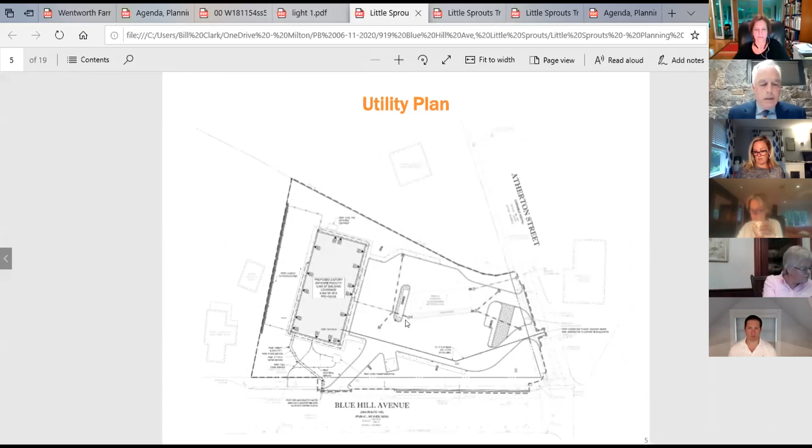Erosion control plan: we've got staked silt fence that will be spread around the site to catch any erosion during construction activities. The property will be graded so that the low point of the property is within the parking area itself.

Next, the lighting plan, and the following two slides show some cut sheets, but there are two double lights, one on each of the islands for the parking area. There's another one just off the corner of the building. It's a single light there.

Those are represented by the first two cut sheets, and then a set of lights that are attached to the building themselves. The lighting plan shows, it's difficult to see in this iteration, but it shows that all of the light is captured on the site. There's no light spillover, and because Little Sprouts is a 5-day-a-week daytime use, 6 a.m. to 6 p.m., there's no reason for lighting to be on beyond 1 hour after the facility closes on a daily basis, so lights, except for emergency lights, will be set to go off after 7 o'clock at night.

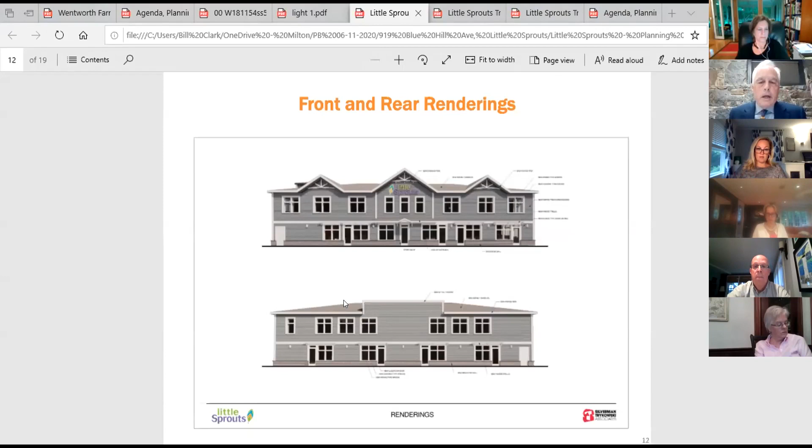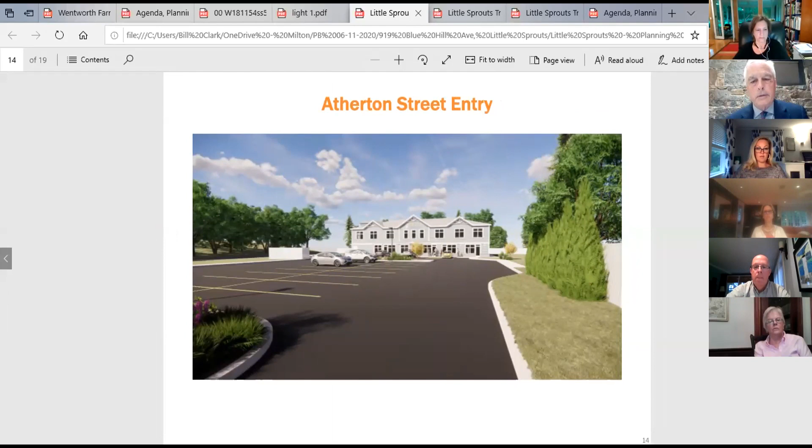Next. And then the Atherton Street entry, you can see the parking stacking on the right for 3 vehicles waiting for parking with the building to the rear, and then 2 further, more close-up looks of the building from areas within the parking lot.

So we know that one significant concern is the ability to park and handle the volume of activity that comes to the site on a daily basis. There are about 26 employees. We show 27 spaces. The employees will be staggered in terms of shifts when they come, because we open at 6, close at 6 or 6:30. There will be numbers coming in at different times, working essentially 8-hour shifts.

The other concern we heard was that Little Sprouts generally has a number of events per year, perhaps a graduation or some other community events, when they invite people in. These are carefully coordinated by the school administration with review and approval by the regional director to make sure they're well organized and that we are accounting for parking and other things.

Examples, some of which happen at the school, some in other places: a family paint night, a breakfast get-together, summer luau, movie night, or potluck dinner. Some events might occur in the evening, but most events happen during the day. There are also occasional events that take place off-site, like a Saturday apple picking trip or some other thing.

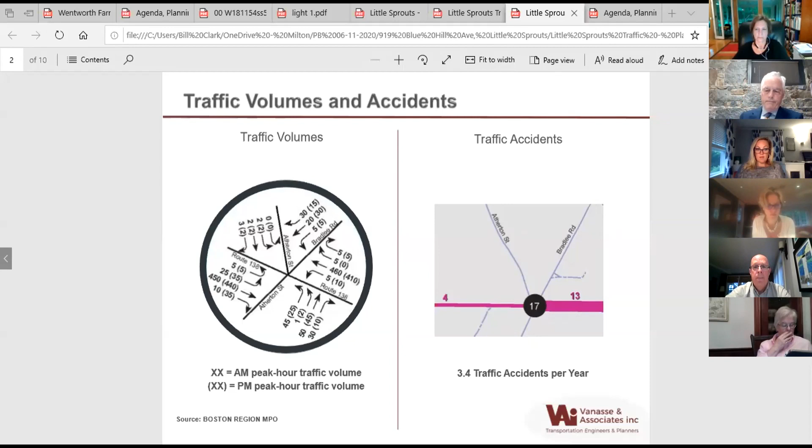In summary, based upon the MPO report, you have an intersection that operates very well today, and also very safely relative to the state averages. Next slide, please.

Our understanding is there is a plan to renovate the fire station, and within those plans, emergency vehicle access will exit from Bradlee Road. There'll be a system called an Opticom system where, when there's an emergency egress happening, the fire station will trigger the signal and get a green indication from Bradlee Road so they can exit quickly and efficiently. Our project will not change those operations at all. They'll maintain the best setup, which is really an Opticom system with quick access onto Blue Hill Avenue.

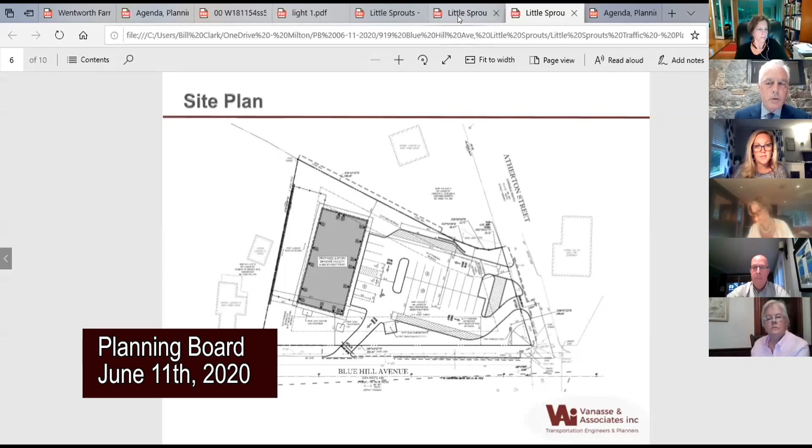I thought I had submitted an update of this presentation with that additional slide. If not, you can update it. There it is.

So those are the signs I was talking about: stop signs, stop bar, do not enter signs, no left turn signs, and that's what we typically do. We put the traffic control signs that you would expect on roadways within the site to support safe and proper traffic flow. Whenever we develop a site near a signal, it's really preferable to have the major movement access through the traffic signal, because that's where traffic is controlled -- that's the safest way to enter and exit a site like this. In addition, we would typically have that right turn out only driveway so movements don't have to go through the signal, which is a relatively easy movement to make, but not left turns either in or out at that unsignalized location.

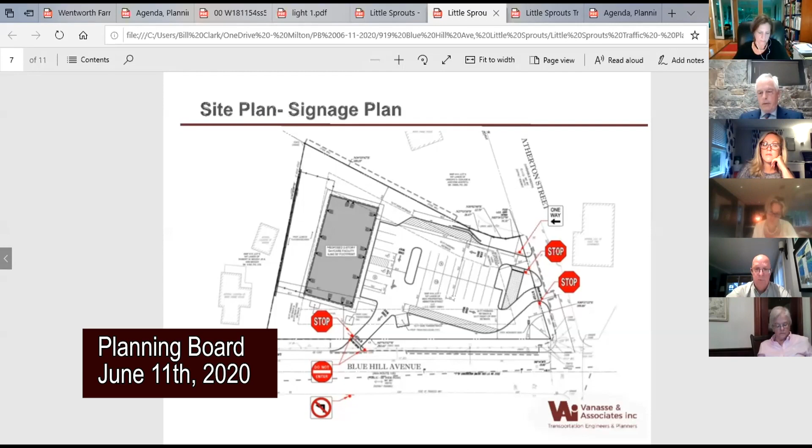In terms of parking, Ned touched on this, but we have 27 parking spaces. We have 7 vehicles in waiting lanes for a total on-site capacity of 34 vehicles. This exceeds the zoning requirement from the town. We've also looked at parking requirements from industry standards, the ITE parking generation manual, as well as some comparable Little Sprouts sites, and we feel there's adequate parking provided on this site as proposed.

We've made a number of recommendations we want to make clear. The project access will be a driveway onto Atherton Street with a 12-foot entering lane and a 12-foot exiting lane, controlled by a stop sign and stop bar. The right turn lane onto Blue Hill Avenue will have similar stop control, stop bar, a no left turn sign facing exiting traffic, and do not enter signs facing Blue Hill Avenue to support that it's exit only.

When it comes to a use such as a daycare, the most important part of the plan is really a traffic management plan, and Little Sprouts has many facilities, so they're well versed in how to manage the traffic. Essentially, you stagger the drop off and pickup times so there's not a large peak, which is typical with all facilities like this. Teacher schedules are also staggered, starting early in the morning and ramping up to peak at midday. In terms of parents, there's not a queuing area on site, so parents are required to park their vehicle and then walk their children to and from the classrooms, and that's how these operations work.

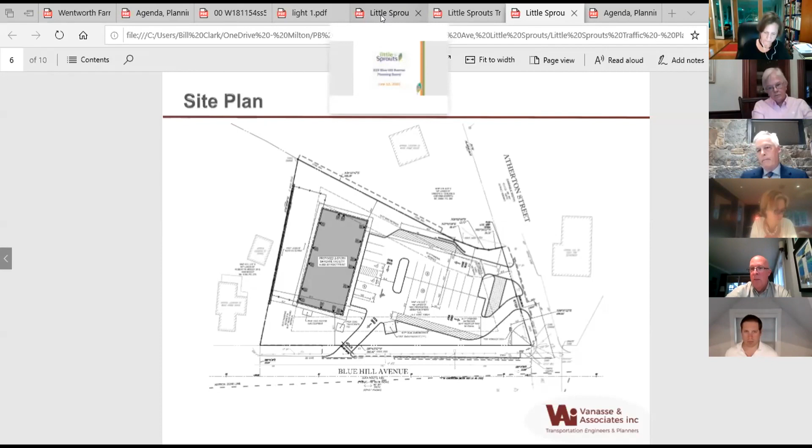So just to clarify, the traffic counts would be a 7 to 9 morning count, a 3 to 6 afternoon count, and a 10 to 12 hour parking accumulation study over the course of the day. Okay. Any other questions, Kathleen, at the moment? Not for Ned, no.

And did you have one for any other member of their team? Okay, so I did have one other question. Have you talked to the Moodys about what kind of fencing or whatever you'd be putting around the playground that they would be looking at?

We haven't. We know that they're quite elderly. I think Mr. Moody—yeah, they're in their 90s. They've owned that property, owned their lot since the 50s. In fact, they owned their property before the town sold it in 1953. So I think Mr. Moody may be in a nursing home, and I don't know about Mrs. Moody, but we have not engaged them particularly in a conversation.

That's it, thank you. Okay, April? Yes, so two questions, Ned. One is our prior iterations of the project were a single story, and from what I recall from those presentations, that was a safety concern rather than doing the as-of-right 2-story building. So I'm wondering if you can address that.

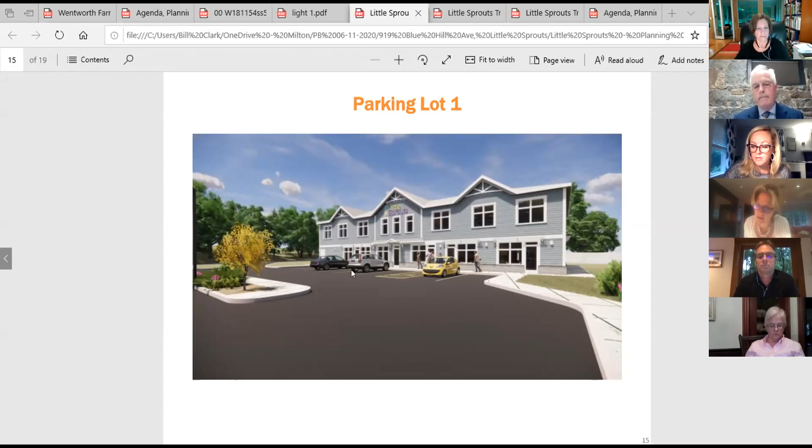I'm interested in the impact on the abutters. The parking looks very close to the property in the back. Is that setback? What is the setback there? 30 feet, and the parking spaces themselves are outside the 30-foot setback. So there's no pavement for 30 feet? There's pavement - the drive aisle itself is not included within the parking area, that is inside the 30-foot setback. The parking spaces are all outside the 30 feet.

Okay, so the setback doesn't start... okay. You have to have drive aisles and they have to connect them somewhere, so there's no setback requirement for the drive.

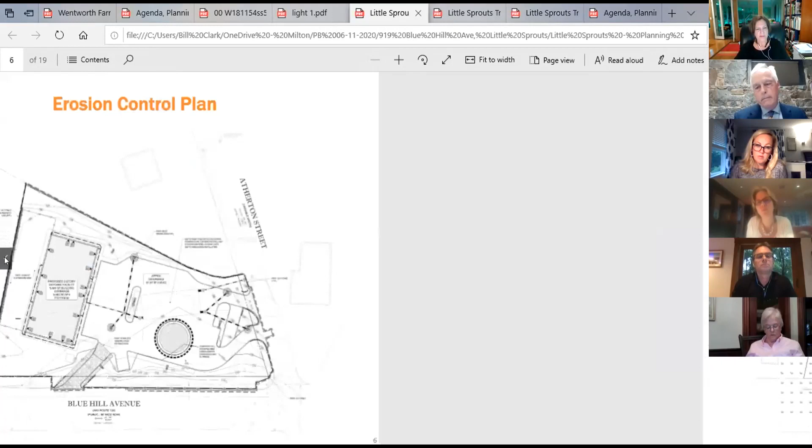Okay. Ned, the parking requirements - in that section of the code, when you have more than 5 parking spaces, I think you're required some greater setback... No, it's when - the setback requirement triggers at 20 spaces. You can't have - I think there's a separate bylaw that deals with parking spaces within the front yard setback, if you are residential use. This is obviously not a residential use.

The parking setback is required for parking areas that exceed 20 spaces - it's 20 or more spaces, 30 feet on all sides. So we're 30 feet in off the front from Atherton Street, 30 feet on both sides from Blue Hill Avenue and the left parking area, and obviously well beyond 30 feet to the southerly boundary line. The building itself is set at 20 - there's a 30-foot front yard setback, 30-foot rear yard setback, a 15-foot side yard setback to the next door property, and because it also has frontage on another roadway, there's a 30-foot setback off of that roadway.

So the building is set at 30 feet off of the rear, 24 feet off of the side where Bill's pointing with the arrow now - that's the side, that's 24 feet - 30 feet off of Blue Hill Avenue, and obviously much more than 30 feet off the front.

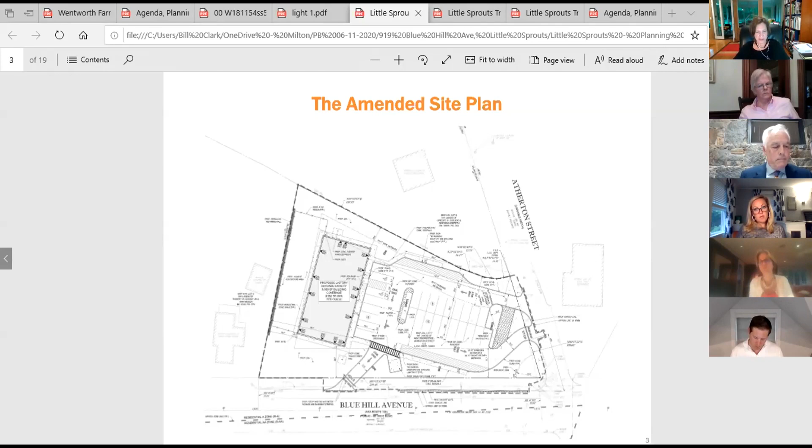Well, I think we need to look at the section of the bylaw with respect to parking lots, because there are some requirements for breaking up parking lots with landscaping, and near that lane, right when you come in, there are buffer requirements - landscape buffer requirements between the parking and the neighbors. I know you have a landscape plan included in the package, but that's something I'd like to look more carefully at before our next meeting, and perhaps you can do the same.

Yeah, we very carefully made sure that those were not being treated as parking spaces. You're not allowed to park and get out of your car - you simply wait for a parking space to open. So we treat it as part of the drive aisle and not as part of the parking area.

But we'll obviously take a look. The other concern I have is the safety of the...

People trying to park in the middle, and then they have to walk through a driving lane to get to the entrance with little ones. I'm also wondering, when they come back to leave, are they going to be trapped, especially the ones in the front of the building? They're going to have to back out into the lane.

There will be, as I said, back out actually, because they'll have to pull in forward, and they're all going to have to back out into waiting cars. Cars are going to be waiting. No, if a car is waiting, it's waiting on one side or the other.

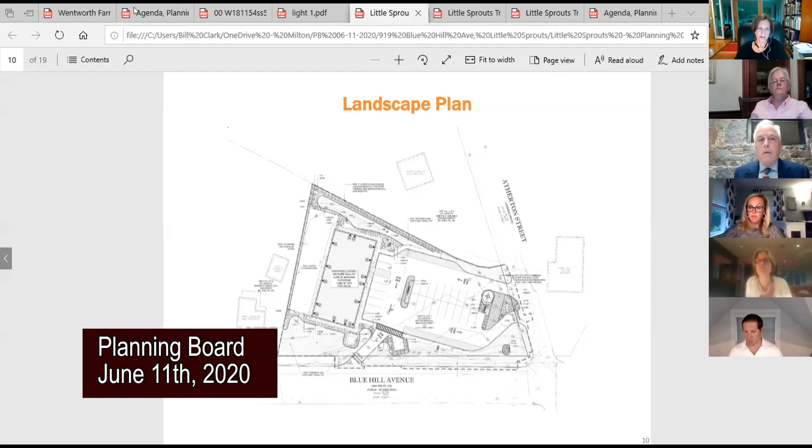Danny, may I jump in there? Sure. I think on the operational side, there is an opportunity to put a condition in on the staggered drop-off times. While that was presented to us as a schedule previously, I think that's something we could consider as part of a decision, Denny, just to address that concern. I think that would be a good idea.

Okay, did you have another question, Denny? I do, and I'm interested to hear from the people, so I'll try to make it quick. I was wondering, how many miles is it from the Little Sprouts to the Park and Ride? It's between 1 and 2 miles. I don't know exactly.

I just know that during peak hours, they could be stuck in traffic for a very long time. I mean, you'd be surprised. Sometimes I've tried to come home through that stretch of road, and it might take me 45 minutes just to get from those lights to where I live. The same stretch just stops at certain hours. So I don't know how that's actually going to work. Sounds good on paper, but I think in practice it's going to be very difficult.

Well, I think for purposes of special events, they'll be timed during the day. There'll be shuttles. People will be parking and shuttling. They'll all be moving at the same pace. For employees, if they use it for park and ride purposes, they'll move in sets of 2s, 3s, and 4s. So 2 or 3 will park, drive to the site in one car, and leave together and drive back to the park and ride when they leave work in the afternoon. So there will be small numbers moving together within that, obviously very congested highway, but it's a very convenient location to take advantage of, and it's publicly available.

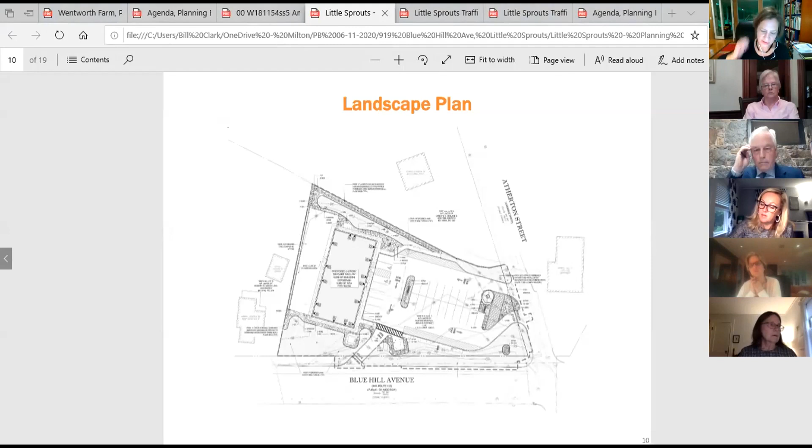A couple of things on the site lighting. Wanted to make sure that the specifications for the fixtures were dark sky compliant, and that they have glare shields or house side shields when they're close to the abutting residential properties.

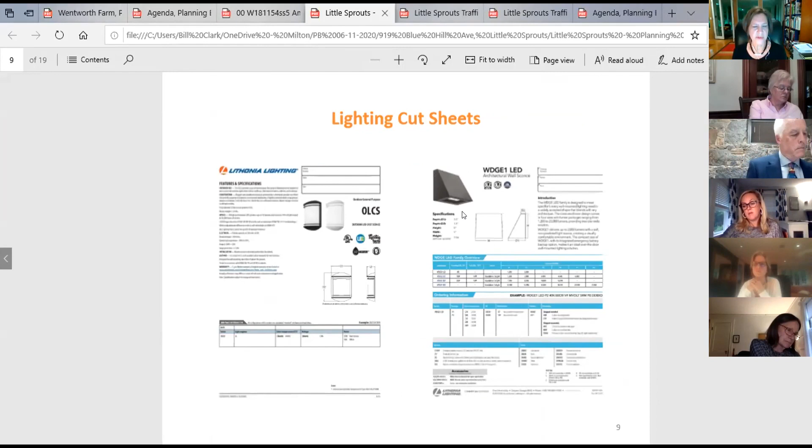If you go to, that's the one that's a building mount, but there's a pole fixture, which is that one. I think I saw there's a 10-foot pole, which is good. I did see that there is one located near the exit drive onto Blue Hill Avenue, and there seems to be a street light there as well.

Just want to make sure we're not going to be putting too much light into that location with respect to neighbors. So again, I'm not looking for an answer tonight, I just want to point these things out so you could come back to us in 2 weeks with some thoughts on those. And on the security lighting around the building, it would be best to have that be a motion sensor, again thinking of the residential abutters.

Right, okay, so I think you already mentioned that the parking lot lights would be scheduled to be turned off sometime shortly after closing, or when the building cleanup is done, etc.

And then I saw there's on that abutting property to the left, I guess that's the Moody's, I believe there's a retaining wall called out. I don't think it's very tall. The plan showed Versa-Lok. I'm wondering why we need Versa-Lok for such a short height retaining wall, and whether that could be more of a stone wall.

And then also I was looking, it says chain link fence, and it seems to me for that abutting property it would be nicer to have a different kind of fence than chain link there. Again, if you could take a look at that.

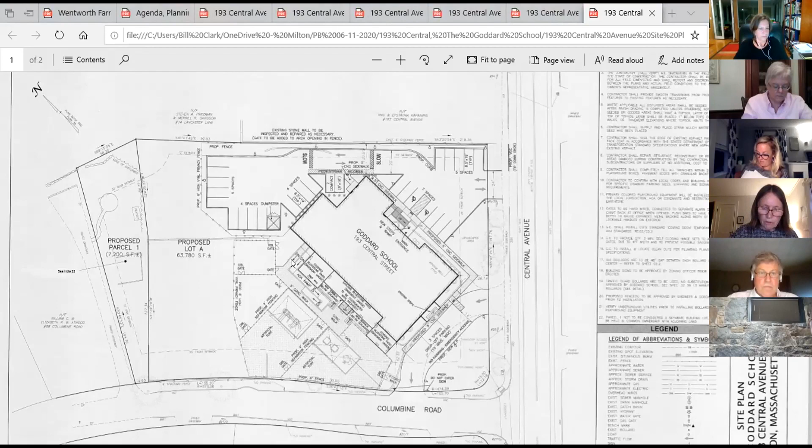The owner of this particular school, which is a subchapter S corporation, will hold a franchise from the Goddard School, and Sunny Verma will be the president and operator. She'll be managing the school, but it will operate under the name the Goddard School. The plan is to use both levels of the building, the ground floor and the first floor, for a total of 12 classrooms.

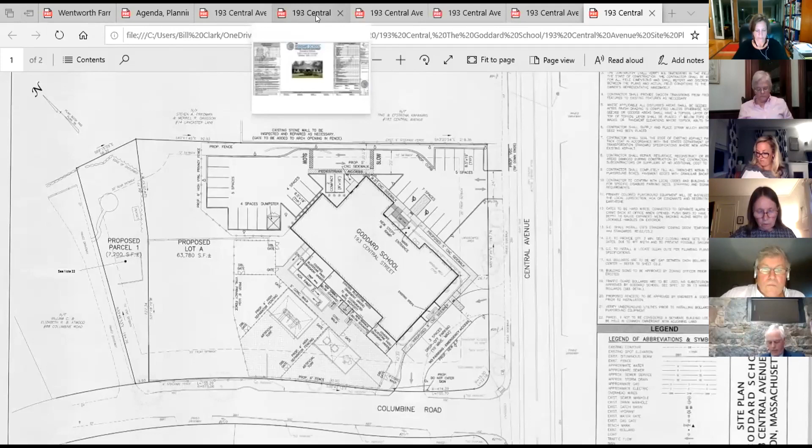These will serve children from infancy until they are ready to go to kindergarten. The program will be available as a full day or half day option, and it will be open from 7 a.m. to 6 p.m. weekdays only. There will be handicapped access at all the doors to the building, and ramps leading out to the playground at the rear.

This will be a change to the previous use of this building. It's a substitution of a different type of impact, and a removal of the type of impact we've had over the years with the facility, with the event facility that it has been. There will no longer be intensive weekend and evening use and noise and large volumes of parked cars on the street.

The parent drop-off times will vary according to work schedules. They will tend to cluster during the times people go to work and come home from work, but because there's a half-day option, not all children will be arriving at the end or beginning of the day. Playground use in the back, where a playground will be built, will be scheduled at different times for different classrooms, so not all children will be out at the same time. With the application, we've provided a 13-page site plan.

What I want to focus on particularly is the site plan we're looking at right now, as well as a stormwater drainage report, a playground plan, and a landscaping plan.

There has been a stormwater study done of the site. There will be facilities to manage stormwater, and there is no increase in flow according to the study that's been done with the facilities that will be installed. The full report has gone to the Department of Public Works to be reviewed and hopefully approved. On the site, there are 30 parking spaces provided.

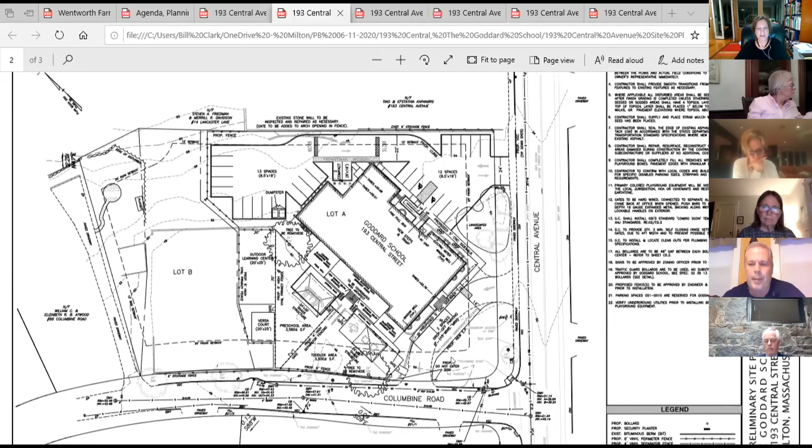Marion, I don't know if you can show that to them. It butts up against Columbine Road. Bill, can you slide that plan over? More towards Columbine, yeah, the playground areas. So playground areas in the back, they're going to be fenced in with vinyl fencing, 6 foot vinyl privacy fence, and security areas for the children. There's no access from those areas right to the parking lot. You have to go through the building or through gates back to the outside areas.

The only thing we're adding to this site plan here is additional handicap ramps. It's not shown in this plan. I think the other one may be better - yeah, the grading plan, that's the one. A little harder to see, but on that one you can see we have handicap ramps leading from the back of the school to the playground area. Those are really the only changes we're proposing to the exterior of the building. There's one in the front, a handicap ramp, but there are existing handicap ramps there now, so we're going to use that one also.

Dumpsters proposed in the back. So that's it for the site plan.

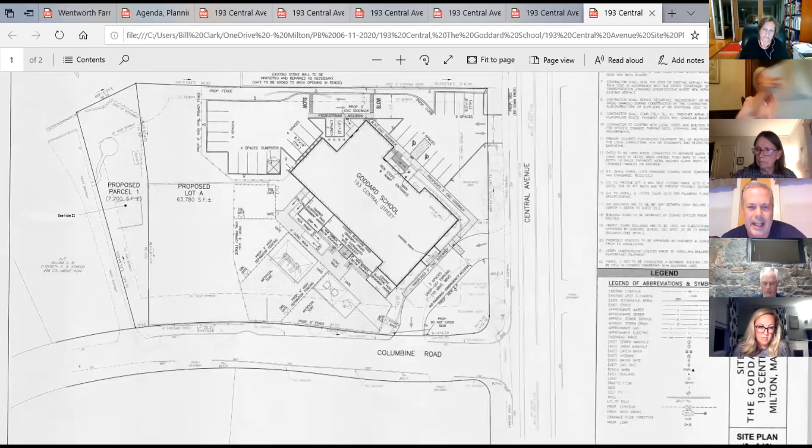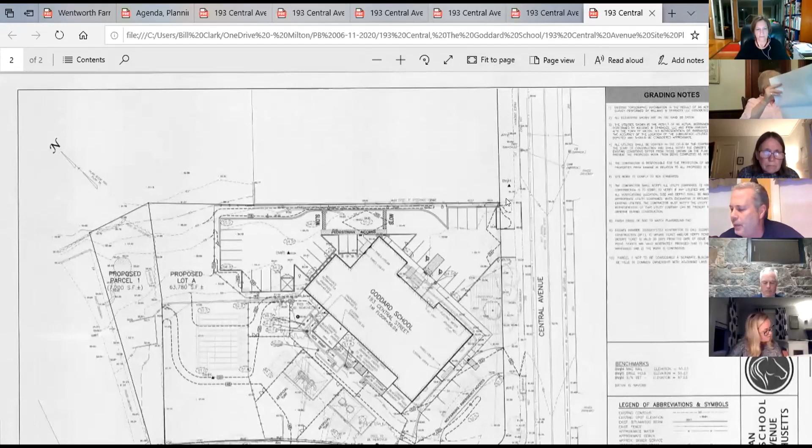If you want to go to the drainage plan, that one works right there. That's good. It's a little hard to see because this plan was divided. It shows parcel 1 on it, parcel A, parcel 1. We have 4 in the drainage study we did. We mitigated for the 2, 10, 100-year storms. It complies with DEP stormwater management standards. There are 4 subsurface drainage areas. There's 4 catch basins on the site, 2 in the back, 2 in the front, which will pick up the drainage and distribute to the 4 individual subsurface stormwater areas.

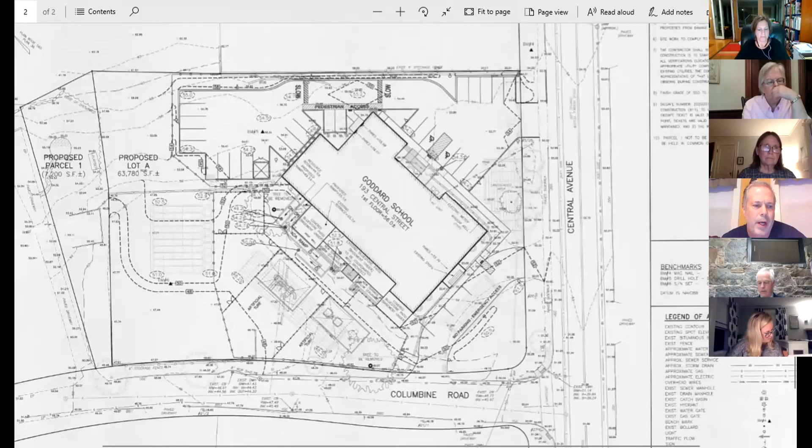We don't show any disturbance on parcel 1. Our grading ends at the lot line. There's no cutting of trees in parcel 1, no grading in parcel 1, no work proposed there. From the property line on parcel 1 to our parking lot area is about 50 feet or so of undisturbed, no-cut zone. We're not going to propose any cut at this time. Trees will remain in place there.

Those trees will stay. Trees to be removed - there's a couple in the playground area, right? Correct. There's one there, one towards Columbine Road, a larger one there, and a few up towards Central Street by the entrance where we have stormwater management proposed in that area. So some of those trees will have to be removed.

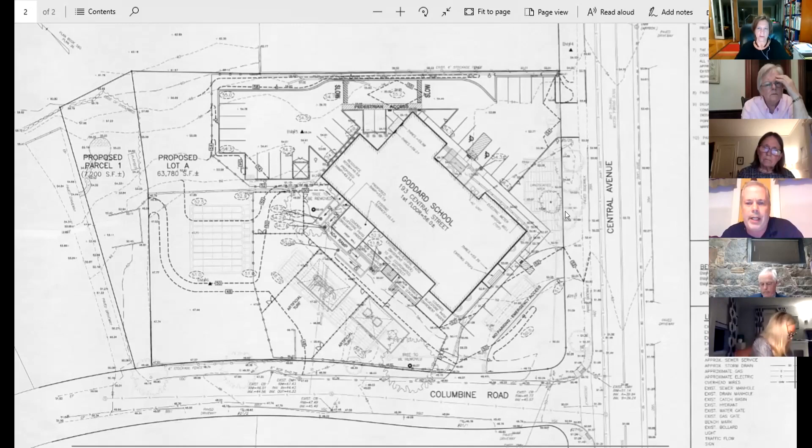If you go to the lighting plan, that would be sheet... C4.1... yeah, sheet 10, or C10, yeah. Just when I thought I had it. We have a photometric plan, I actually don't remember this one. It's the 10th page, it's titled C4.1. Yeah.

While they're looking for that, can I ask a question? Go ahead. Marion, on C1.1, you've got Lot A and Lot B. Is that sort of area between that triangle piece, is that sort of lot? How much are you buying? We're buying everything except the 7,200 square foot area, which is parcel 1 on the updated site plan, and that's what you need to look at to see what the site is.

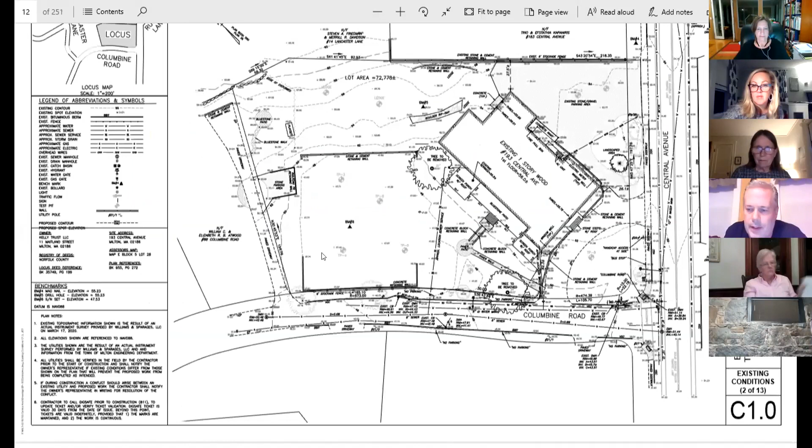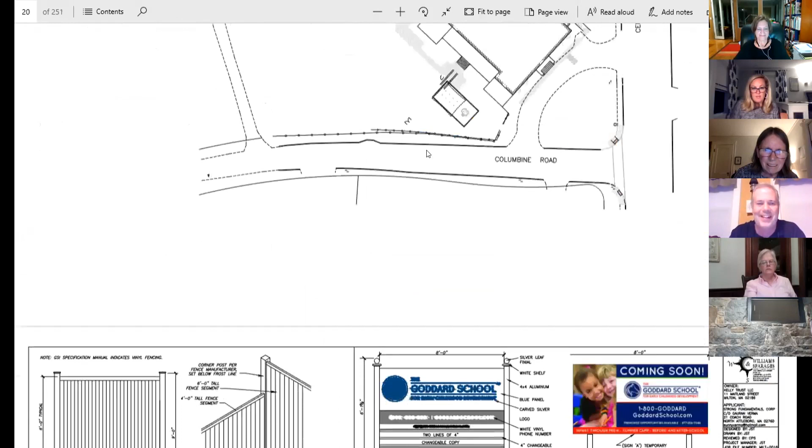That's sheet 2 of 13. So if you go to sheet 10... keep going... 7, 8, 9, 10. What happened? It's not showing the whole thing. That's odd, that would be the sheet. Keep going, you haven't gone far enough. I'm going to 12 now. I don't know why these are doing that, but it's not showing the entire sheet.

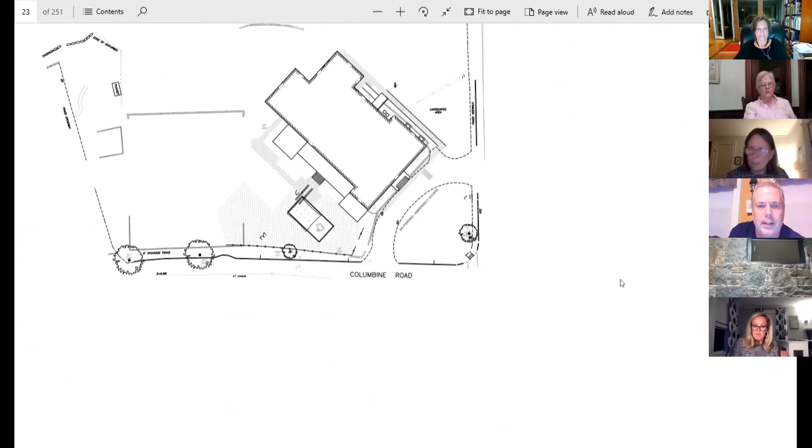Does the hard copy show? It's after utilities, now that's the architectural plan. Let's try... drainage, details, then utilities, then photometric. Those are the drainage ones. Ooh, that's why that thing's so big. I'll speak as you look for it.

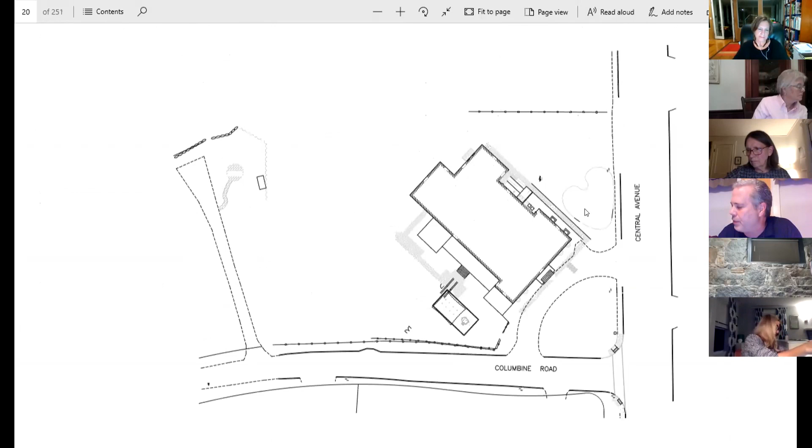So we're proposing 12 light poles on the site, dark compliant. Typically a site like this we'd have probably 6 light poles, but because we're trying to be dark compliant, we have them 12-foot mounted, lower lights, so they basically stay on site with the foot-candles and they're spread out throughout the site. We have 2 at the entrance, 3 out front, several in the back. Typically we'd have half that many and higher poles, but to reduce glare and off-site lighting we've added additional lights and lowered them to be dark compliant.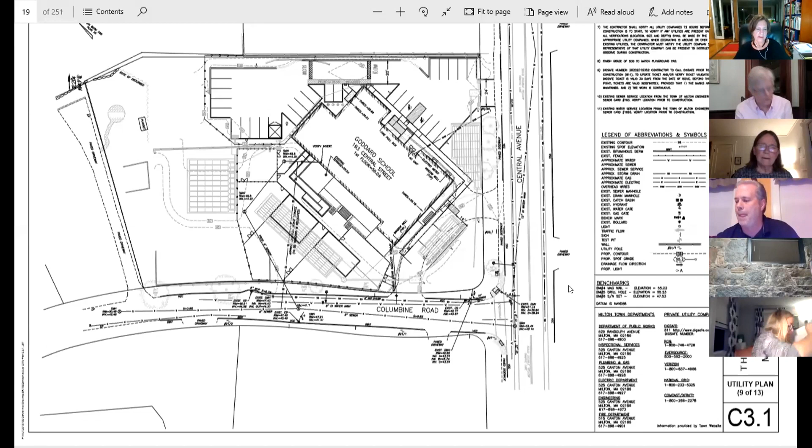They should be, you can see them on your hard copy. You can't see them on this set for some reason. We're using... everybody did get a full-size set of plans. Yeah, they're right here, but members of the public can't see it, and I didn't bring mine home either, but there's 10 and I can't see 10. Let me see if I can pull it up, I can share my screen as well. What's the file name you have open, Bill?

I don't know. All right, I'm going to do a screen share. Site plan application, Goddard School, 6/1/2020. Bill, end your screen share and I will do a screen share.

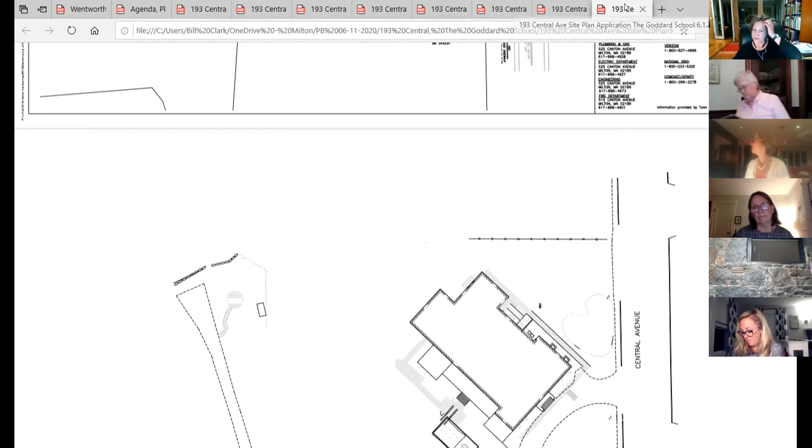All right, so can everyone see my screen? Yes. That only is 3 pages though. That's the other one, yeah.

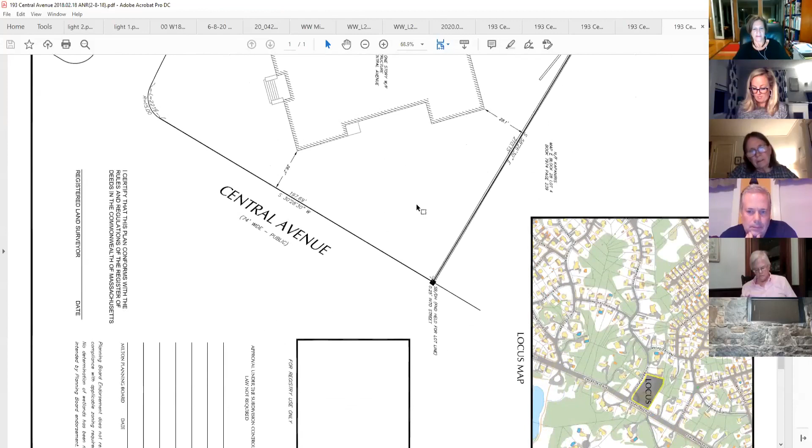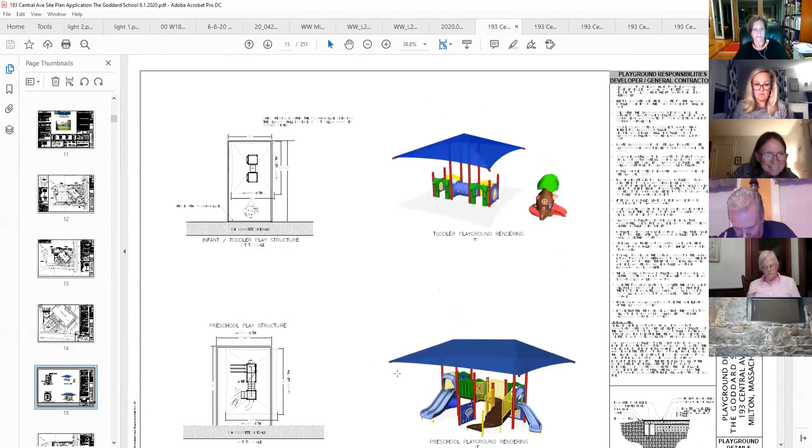It's not that one. You didn't put it in the OneDrive then? I took it off the first one. This is the updated site plan. I took it off the very first one, all the pages, started with the narrative. All right, I got it. That one, and then go down to 10. You see it still? No, go down, that's 7. That's 8, 9, here it is. There's 10, this is it. There it is, okay, you got it.

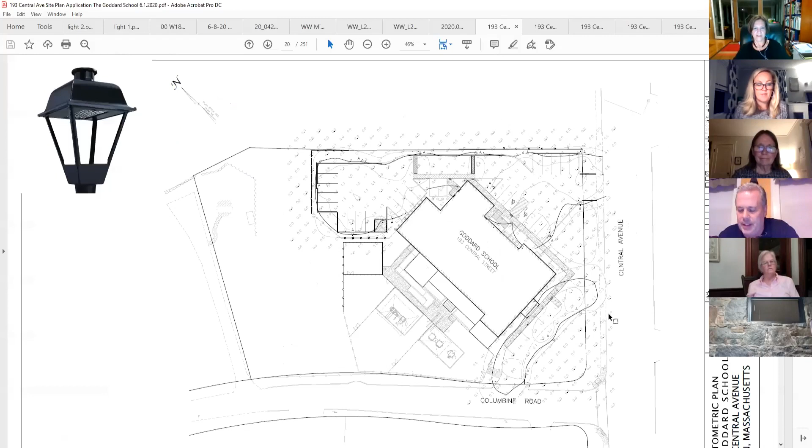It's still tricky to see, but the light we're proposing is called a Traditionaire, and it's an LED light. It has an old-fashioned style look to it. We have it labeled as letter A, up to the left. That's the light we're proposing, a 12-foot mounted light. The intent was to be dark compliant.

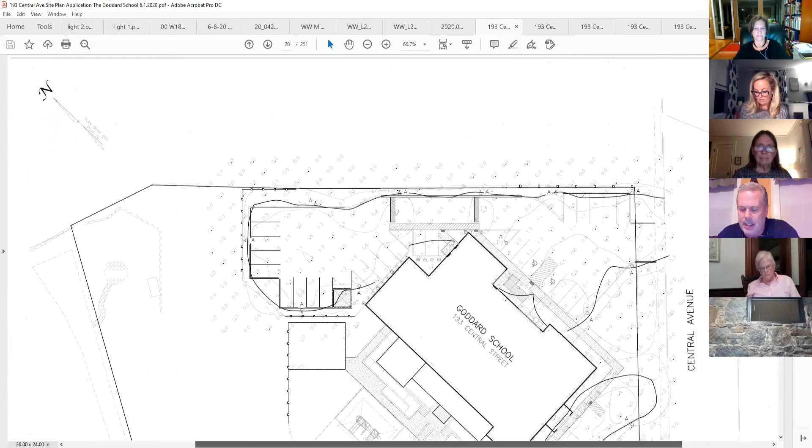So this is the location here, wherever there's an A, everywhere there's an A, correct. So we have several, and typically would have 6 maybe, but because it would be higher mounted, brighter lights, to be dark compliant we have 12 lights, 12-foot mounted with shield guards in certain areas. On the abutting property too, there's a retaining wall and a fence which will even more so help block the glare on the right-hand side off Central Ave.

So that's it. I'm sure there'll be some lighting questions, but on our plan we didn't propose any security lighting. Basically we'll leave it to the architect and their plan, and we'll try to coordinate our style with their style.

So were there any other drawings you wanted to, Marion or John, draw our attention to at the moment? I don't think so. Yeah, we have all the layout, the architectural layout plans. I'm not sure whether you want to go through those in detail. The main features to point out are that there will be an elevator constructed in this building in addition to the handicapped access exterior finishes. That requires a central area that may protrude somewhat from an opening in the roof. That's a new feature, there was no elevator in the building before, and it's necessary to have handicapped access from the ground floor to the main floor.

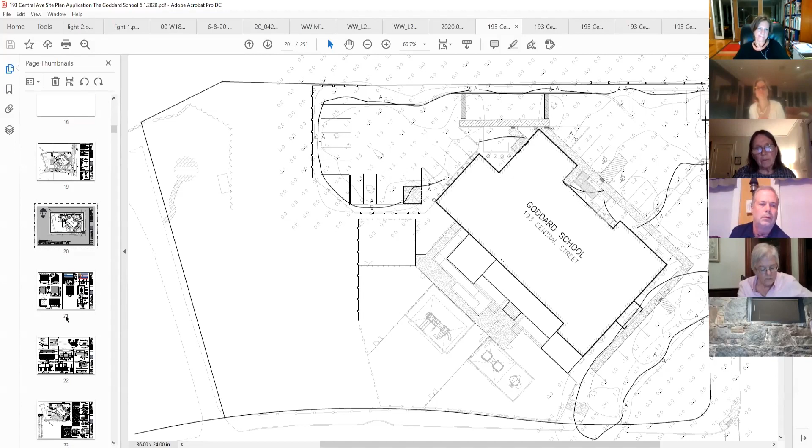Otherwise, there's going to be substantial renovation in the interior of the building to lay out the classrooms. There will be ventilation, possibly provided more ventilation from classrooms directly up to the roof. Those are the only changes that will be caused by the interior design of the building. If you have an interest in looking at the layout, we can put it up. But all the interior is coming out, right?

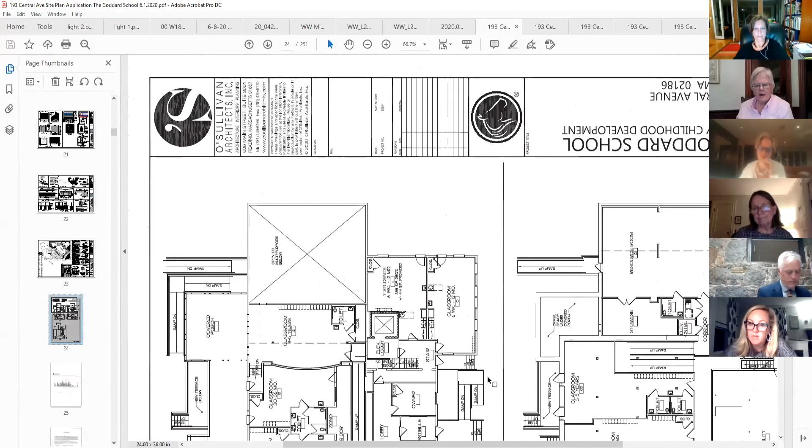As far as I can see, you have to lay out all these classroom spaces, including the stage area. I can't point to things, but I think the stage area is a raised area still, I'm just not sure whether the use is the same.

So the orientation of this plan would be, this side is the Central Ave side. On the right, this would be the lower level, and this is the Central Ave side on the first floor. And these terraces go out to the playground area and the new entrance from the parking lot here. It does show a ramp up to the stage, called the classroom for ages 3 to 5.

This office is here at the new main entrance. The existing entrance that people are probably familiar with is still an entrance, although it's not handicapped accessible. Then it's classrooms and some offices, and downstairs it's more classrooms.

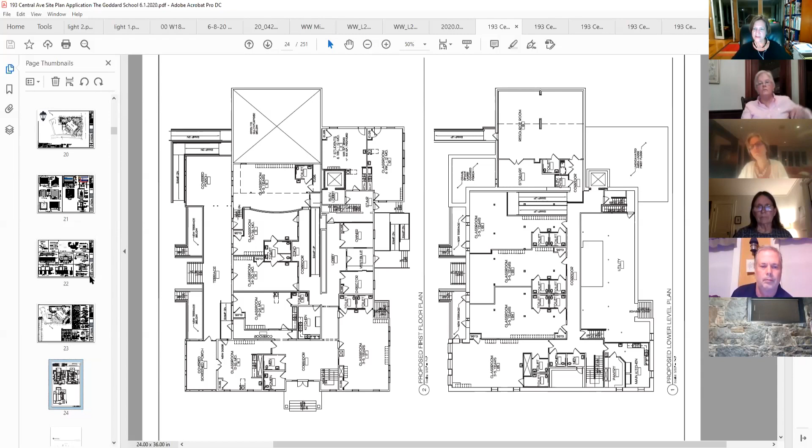Okay, so Kathleen, do you have questions? No, I just wanted to disclose that I was one of the signers of the special permit for the zoning board when the club came before the town for approval.

Do you see that as any reason for you to be biased in your review now? No, I don't think so. It's not the same use.

Okay, very good. Denny, do you have questions now? Yes. So do we know what's happening with Lot 1? Are they planning to build there at any point in the future, or they're just not going to buy it, or we don't know what's going to happen with that lot?

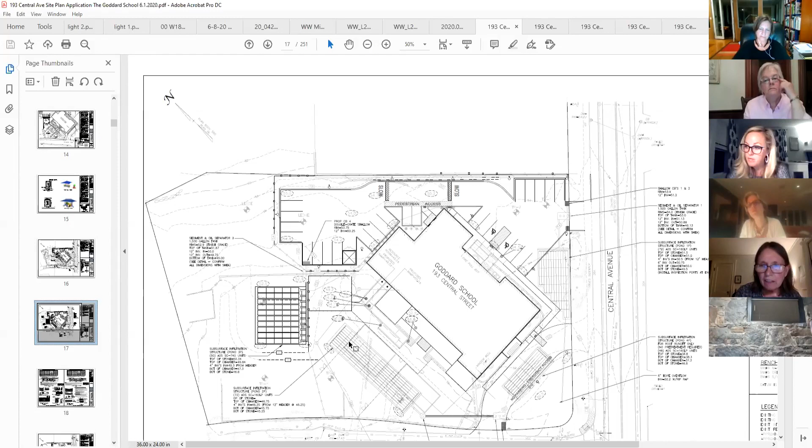Shall I answer? Yes, please. Thank you. If you're speaking of parcel 1 on the updated site plan, the 7,200 square foot lot, yes, the owner is retaining that. That's in litigation right now with the neighbors, the Atwoods, on Columbine Road. It doesn't have anything to do with the school or the site. It's not going to be used by the school for anything. It's not a conforming lot, it's a non-buildable parcel.

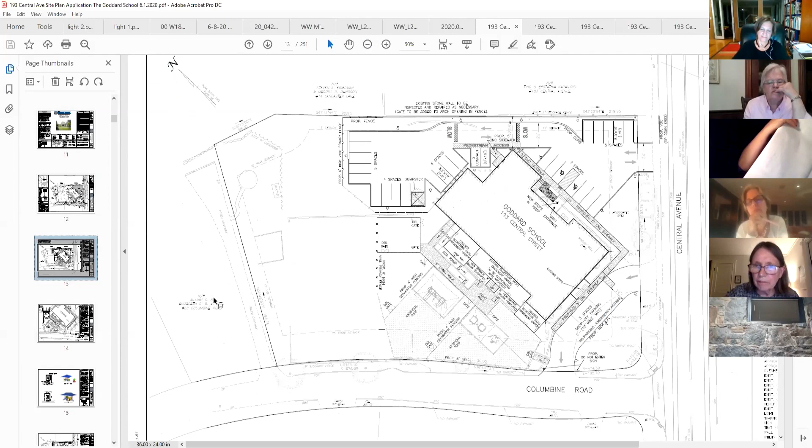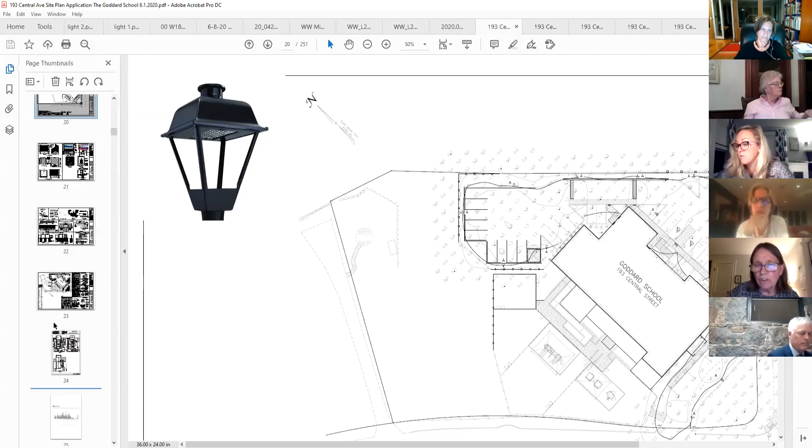And what would the impact to Columbine Road be? So the impact to Columbine Road, well, there won't be any entrances and exits off Columbine Road. It will look different because they're going to be looking at playground facilities. There is landscaping, we didn't review the landscaping plan yet, and it might be something to be discussed, but the residents of Columbine Road will be able to see children in the playground when they're out there, and they'll see the playground equipment. There will be an area in the rear of the lot with the drainage structure under it that's all just open area.

Can you describe what the experience would be? Would they be hearing the children out at recess, like from 7 to 6, or would there be limited times? I had that question from one neighbor, and I asked Sonny Verma. As he explained it, this is infancy to pre-kindergarten, so these are very young children. They would go out into the playground with their classes at staggered times, and there are also a couple of different playground areas for different age children, so you would never have the whole population of the school out at one time. I don't know exact playground times, maybe Mr. Verma would want to answer, but they might tend to be towards the middle of the day, or they may just vary throughout the day.

So would your landscaping take into consideration sound mitigation for the neighbors?

We're happy to talk about that if that's an issue for a neighbor. We'd have to look at the landscaping plan to see what, if anything, is planned along that edge. I know there's a fence, there has to be a fence, and I suppose there might be some sound mitigation just from the fence, if they wanted. I don't know whether that's an issue or not. I'm sure the neighbors may have something to say about it.

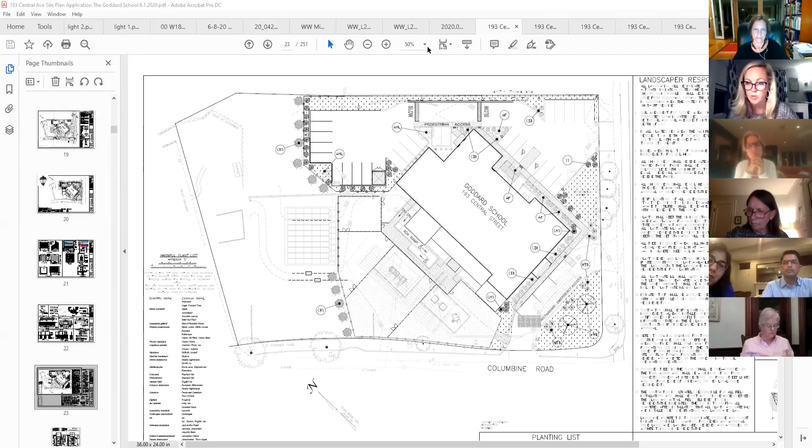The last question is about the playground space. It looks like there are 2 separate playground spaces that are gated — is that for different age groups? Yes. Okay, thank you. Those are my questions. Thank you, April.

Rich, do you have questions at this time? You might be muted, sorry. Nope, no question. All right, then I have a couple more questions or comments.

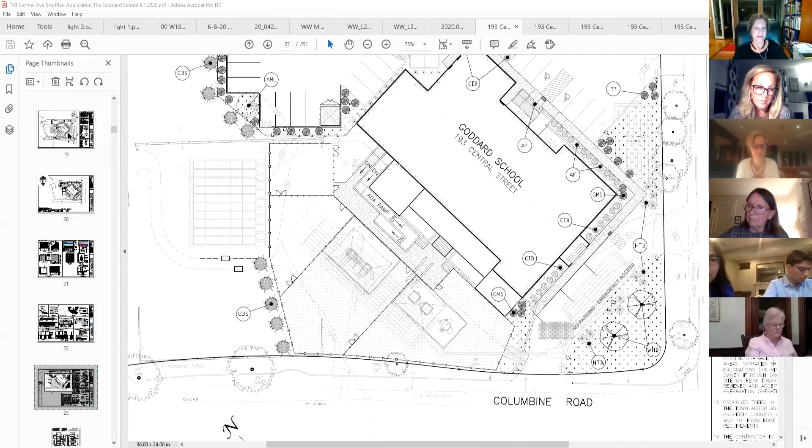I'm going to go to a different plan here. Can I say something while you're doing that? Yes. If the public wants to make a comment, if they hit the bottom of their picture, they can raise their hand, and we'll see it and call on them that way. Otherwise I really can't see a lot of people. Right, with 30 and 40 some, it's a little harder to see. We'll do our best, and we'll definitely be continuing.

I wanted to point out here and ask this question. This is Central Ave on the right, and the abutter here. There's an existing change of grade already, and now these contours are being pulled over like that, I guess, to create somewhat of a swale this way. I'm not quite sure, but I'm wondering if you've studied how that impacts this boundary, since you're so close to the property line here with this direct abutter, and whether you've spoken to the abutter about having these parking spaces and drive access so close to their property.

No, we haven't had any contact yet. I'm happy to do that — let me just leave it at that. Okay, that would be great if you could report back. The one we've tried to lay out is fairly compact, that doesn't use up the whole site — we don't have parking spread all over the back. But if there are issues like that, there's a fence along the edge there.

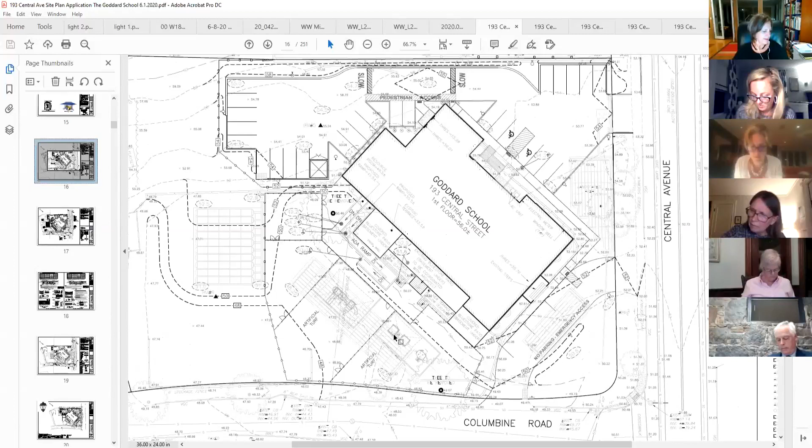And then I already mentioned this drainage structure — I'm wondering why I can't go underneath the parking lot here and retain these trees, which are a nice stand of trees and rock along Central Ave. Does the engineer want to talk about that, or shall we just leave that? I think you can come back to that, if you don't mind. Okay, thank you. And then on your drawings here, C 5.1, I think, let me get to it.

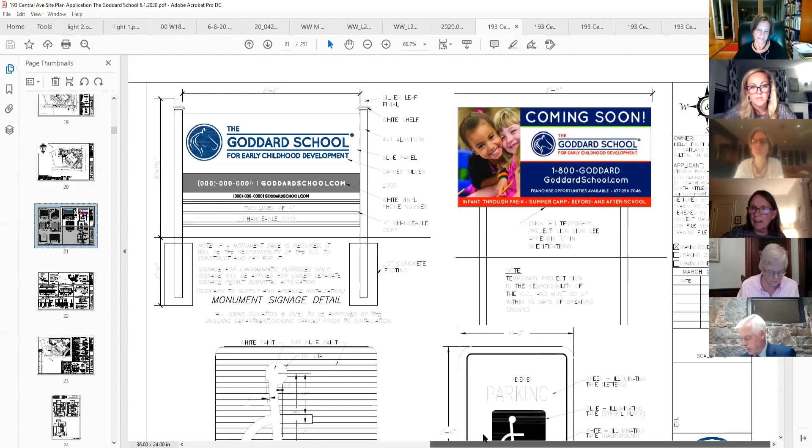This drawn up as part of, this is standard when they're doing franchising, they show this type of signage. They do use these signs at other schools. At the present time, all I've discussed with the building commissioner is a name sign over the door, the Goddard School. He said that's what he would allow. If we needed to have a freestanding sign like this, I believe we have to go to the Board of Appeals and get a variance because it's in a residential district. So it is noted here that it's according to what the town would allow, but the planning board can't even approve a sign, and this is not currently one that we're proposing.

But if you have comments about freestanding signs, we'd be happy to hear them. It'd be good for everybody to know if the planning board has thoughts about that. Well, I can give you my personal thought: 6 foot by 8 foot would be inappropriate historically for that building. I don't know whether the rest of the board members agree with me, but that's definitely my opinion. That's why I raised the issue. I think a small sign out front, in the landscape, would be fine. If you wanted to do something out here, that seems like it would be appropriate, but not that scale. Something more historic looking. It's just really out of place.

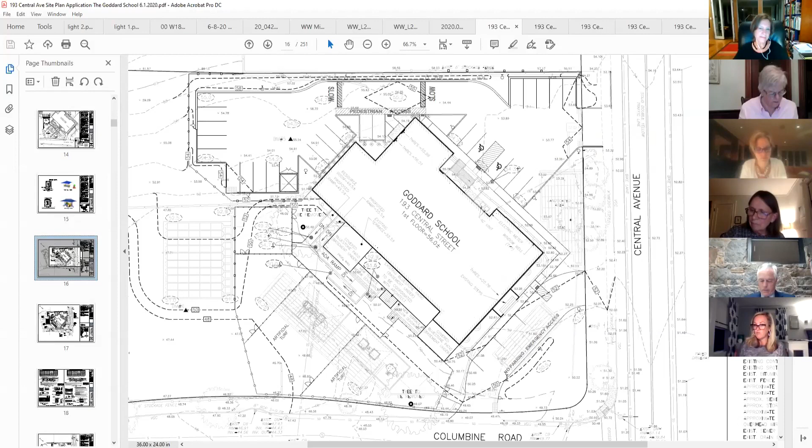Okay. And then I think in the discussion of the photometric plan, maybe I should just go to that quickly. I think it was said that there would be no security lighting, but I have to imagine, given that it gets dark so early in the winter, that there would be some kind of building mounted lighting on this end of the building. There will be.

What I was saying is that on our plan, we just did the parking for the entrance, the access way, and the parking area. The architect will have security lighting on his plan set. For what you're asking for, there should be lighting in the back and at the emergency exits out front. Those aren't shown in this plan, but I'll work with Joe Walsh, the architect, and we'll provide that on another set of plans.

Could the planning board let us know though what their concerns are with security lighting, so everybody knows? For example, in the previous application, you said you preferred motion sensor lighting. Well, my sense was that you just don't want lights on 24/7 in a residential area. So if you have them on motion, that means they're only going on if somebody's there. And if you have lights in this area which are just operational because you're open until 6, that's fine too. We just like to see what they are, because the idea for this is that it's a commercial use in a residential district, and we want to make sure that we mitigate the impact as much as possible. So the lighting is one of the factors for that.

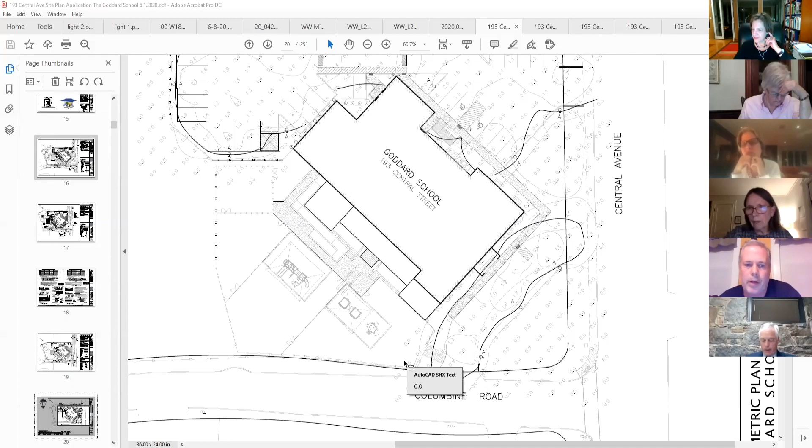And generally speaking, it's the lower poles that are better, pointing downward. I don't know, did you have 10-foot poles or 12-foot poles here on these lights? 12-foot poles. Again, maybe you want to consider 10. We had a recent application where changing to 10 did not change the quantity of fixtures, and it didn't negatively impact the foot candle level.

Okay, so it just kind of reduces the spread. I mean, the spread's contained, but you still see lights, right? Even though it shows that, like if you're sitting across the street from a light, you can still see it, even though the foot candles are not dropping right on you. Right.

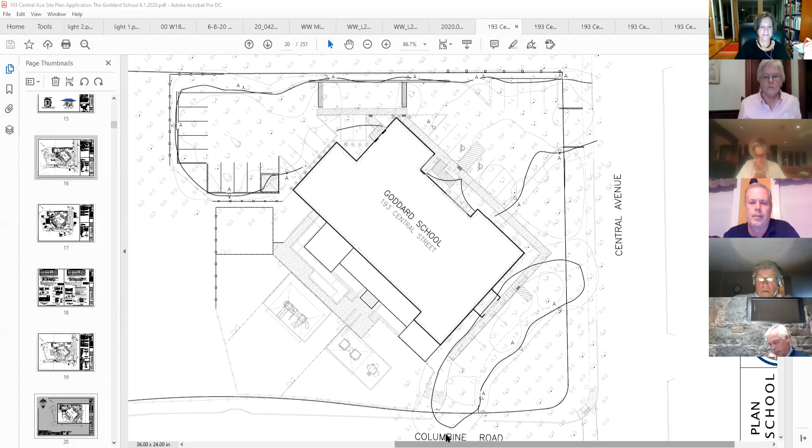Cheryl, what do you think of dark sky compliant here? Dark sky compliant also would help, and with shielding, like here, it looks like it's showing no light spill onto the adjacent property, but I'm not sure about that fixture type. Does that mean there's a cutoff in the back, making sure nothing spills, because those are dark sky compliant, meaning the light comes straight down and doesn't go to the side. Yeah, but why wouldn't anything spill out the backside towards the abutter without a shield? Yeah, that could be shielded. We could shield 3 sides, or 2 sides. So we'll show more detail of the shielding locations on the plan.

Okay. All right, so then we're going to go to public comment now. And Bill, you said you sent me a text that Greg Jemmy had his hand up, the only one that I've seen. Okay, so can you unmute him then?

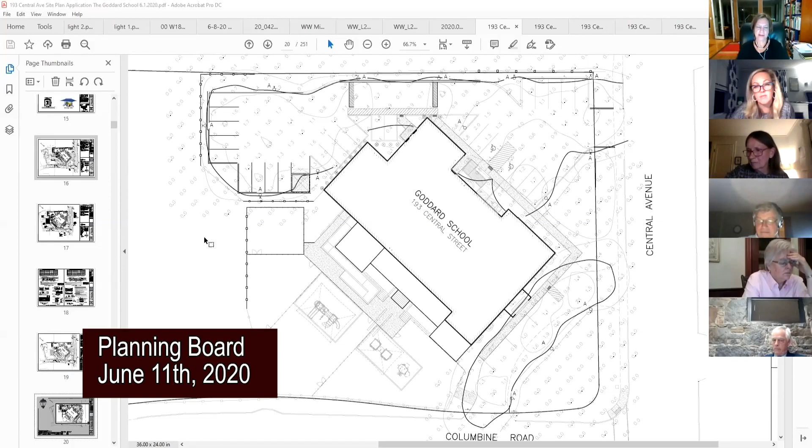Okay, so Marion, to that point, I think if you could -- I know you submitted in the application a pickup and drop-off schedule -- can you plan to run through that and how it would work, like how many are arriving from 7 to 8 and so forth, so we and the neighbors can have a better understanding of how that's distributed over time.

Yeah, I'd like to work with the applicant, and we did present. I did get tables of traffic flow from other Goddard schools in Massachusetts to help me understand what the traffic flow would be like. We'll use those, but I think together we can explain it. I'll probably do something in writing and then explain it at a meeting, if you want us to do that at the next meeting.

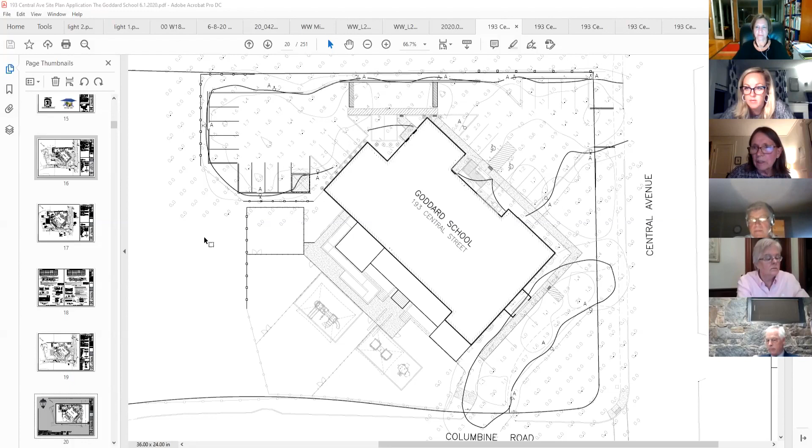We use Central all the time, and in the morning the traffic can back up at least to Valley Road, so an additional 16 cars is not going to help that at all. Even if they say it's going to be staggered, I'm not entirely sure that that's going to be the case, particularly at that 6 to 8 a.m. time.

So I would like to see a traffic study that was specific to the site and specific to the traffic pattern. It may be very hard to do with unnormal circumstances right now, but to get an idea of that flow.

Secondly, I definitely agree with the keep the trees notion. One of the reasons we moved into the neighborhood was because of what it looks like, and the trees are an absolutely essential part of that. So to whatever extent the trees along Columbine, along Central, in the front can be maintained, that would ensure the integrity and the beauty of the residential neighborhood, which is really important.

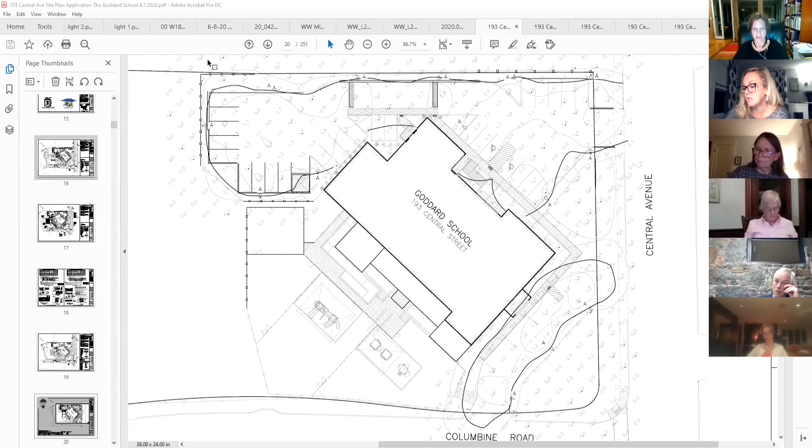So, Jenny, this will be continued to our next meeting, which is two weeks from tonight. And these documents are on the town website, or will be - Bill can confirm that - so you can have access to those to review as well.

While on that point on the lighting, there's a fixture right here and a fixture right here. Maybe you can look at just having one right here and moving that one in here so that it's not so close to the street. And then again, these that are very close to the street.

And what I would say, Marion, is that the dealers, the representatives for the lighting manufacturers, will run these photometric plans, but they can also output that in a three-dimensional format which can kind of simulate what the light would look like. We received that for Milton Marketplace, so maybe that's something you can look into - the spacing, how close these are to the street, and give an idea of what that light level looks like. I would say these at 2.5 foot candles is not extraordinarily bright, but it would be something helpful for people to understand if they could run one of those.

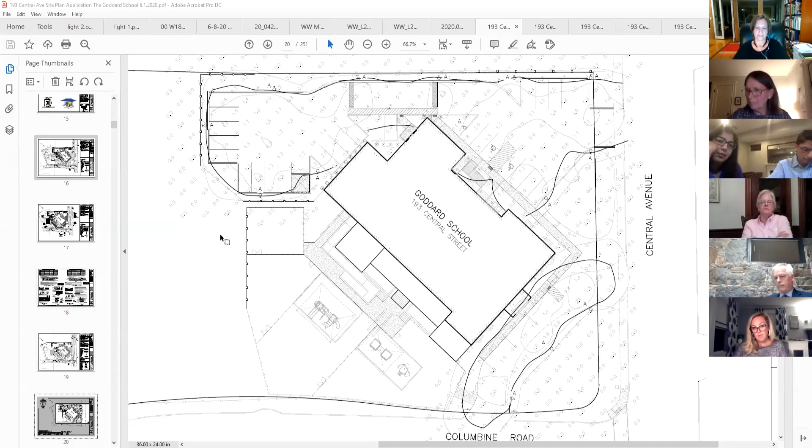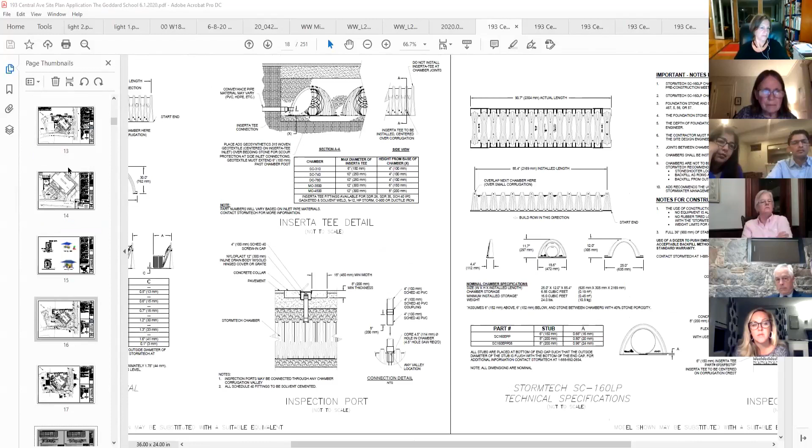Thank you very much for that. My second question concerns parcel 1, the far eastern part of the property. That's the piece we're in litigation with Peter Kelly. It was an adverse possession case, et cetera. But there's another lot between parcel 1 and the fence at the back of the parking lot there. And I'm wondering, basically, where the litigation is. It's labeled lot B in some of the drawings. I'm wondering if there's a plan for that parcel.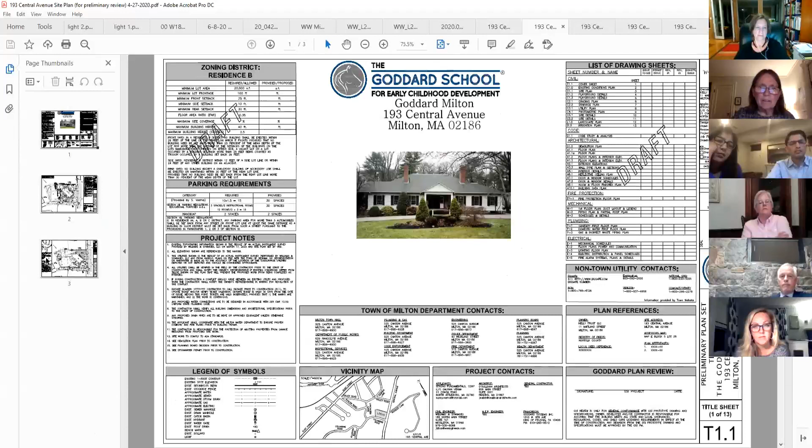No, the ANR plan that is being recorded shows the parcel you're talking about. This is not the updated one. Could we have the updated site plan? I'll look at it, Marion. Yeah, yes. Yes, that's it, I believe. The ANR is on there. No, it's not, I think that still shows.

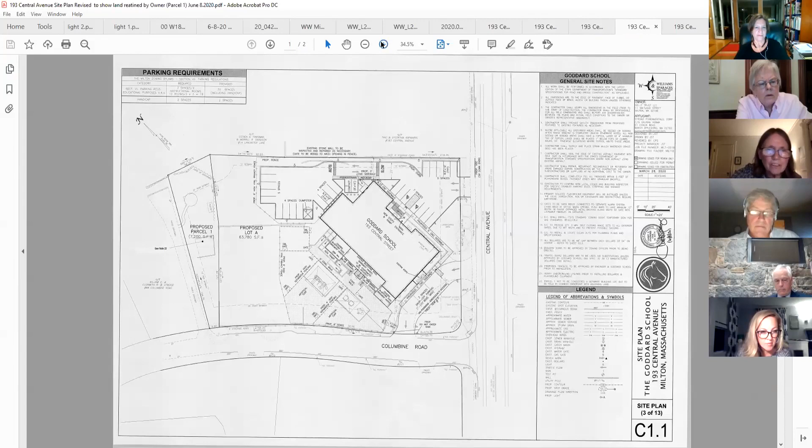Right, so in that drawing where it says lot B. Okay, that's the same, there you go. Okay, so there it says it's called Lot A. Yeah, so this is the new one. So this is dividing. Right. Yeah, you're right. Yeah, okay. At least for the site plan purposes, the whole site is Lot A.

Right, and then this parcel 1 is the non-buildable 7,200 square foot other parcel on the ANR. We are not, the applicants are not purchasing that. No, I understand that, but you see that bit of land right between parcel 1 and the back of the parking lot? Yeah, that region there. That's all part of the site. If that has a name, what is the plan for that piece?

Well, there's some drainage structures on the lower part of that, closer to Columbine Road. When you look at the drainage plan, let's go back to the drainage plan and I'll show you. So it is an active part of the site because we're using part of it. There it is, see that? There's a drainage structure on there.

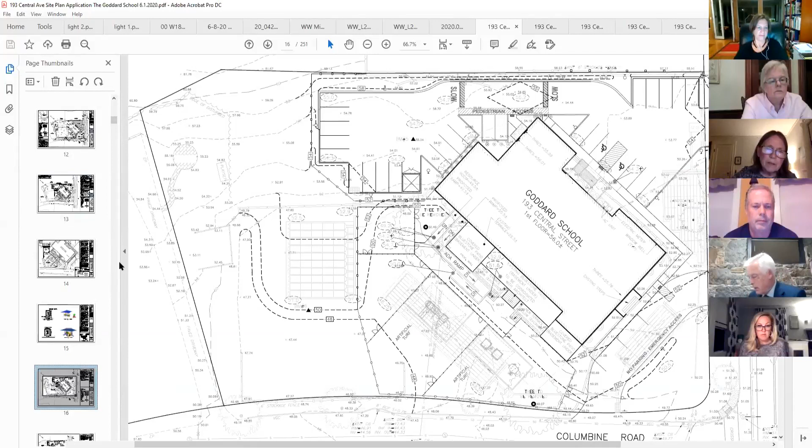That's only in the lower part, not in the upper part. Otherwise, it's going to be left in its current condition, I believe. That's correct, yes, that's what we're proposing. From the existing wall back, we're not going to disturb it other than the parking lot. So it's about a 50-foot buffer between the back of our fence to the edge of disturbance of the abutting property, which would be lot 1, parcel 1.

Where the drainage structure is on the lower side, where the wall is down in the lawn area, there are no trees there now, it's actually a lawn area. The grade will pick up a little bit there for the drainage, probably I think 3 feet to 4 feet, but it'll gradually still be a lawn, open lawn area, kind of like it is now. So we're not proposing any tree cutting from the fence back to the disturbed area right now.

Okay, thank you very much. The drainage structure, is that an above ground structure or below ground, or both? Subsurface. Okay, thank you. Any other questions, Mr. Atwood? No, thank you very much. Not at this time. Okay, thank you.

Is there anyone else who has questions or comments for us on this application? No.

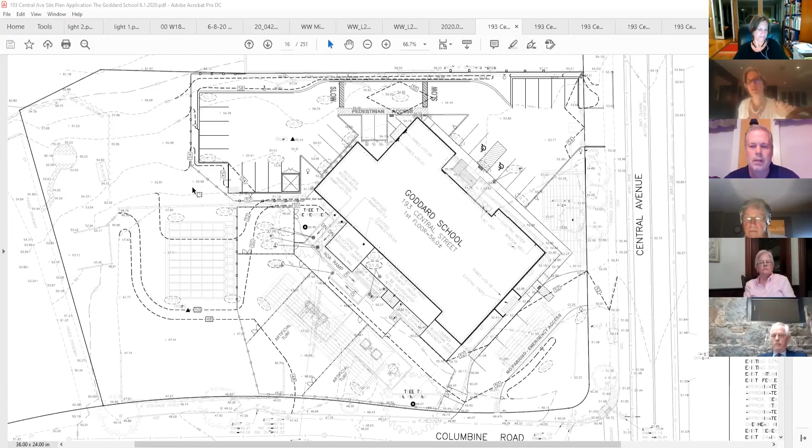I guess I had a question. This is Denny. I might have missed this, but are you asking for any variances, Marion? No. Okay, thank you. Then last call for any other comments, raising hands.

I have a comment. Just on the time frame of how to move forward, I feel like there's an awful lot of work to be done on this project, between the department heads and getting the architectural plans, updating the photometric with the lighting, the historical commission consultation, the detail on the equipment on top of the building, trees. There's a lot to be accomplished. I don't know if putting it back on the agenda in 2 weeks is going to give them enough time to make effective use of it.

I would suggest that we wait until the following meeting, July 9th. If Marion has completed, we still need to update the application with the appropriate number of students and what have you. If she wants to submit more information to us between now and then, that would be fine. But I don't feel like we're going to have enough progress done between now and June 25th to have that conversation. Well, point taken, and we would like the information a week in advance of the meeting, so that would only give you one week.

Marion, what is your thought about that? Well, I think that we need enough time to get everything together. If there are any comments from the engineer or the architect or the applicant, that's fine, but it sounds to me like we would need that much time.

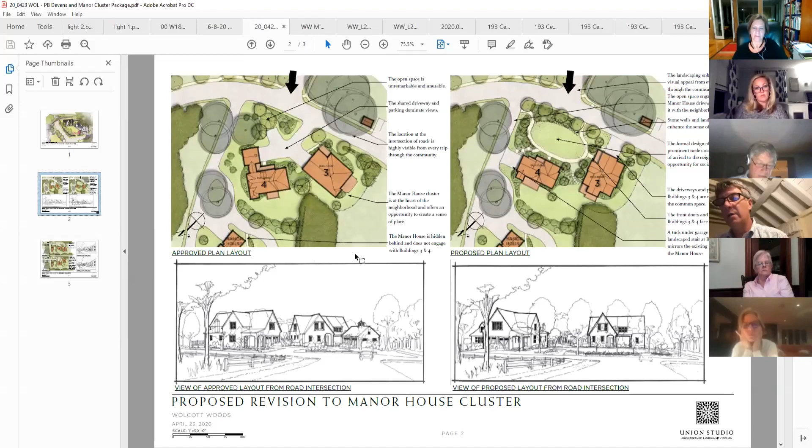Union Studio, Peter and I started looking at this with their new architecture and saw an opportunity to create a focal point in the land plan at that intersection, as you are either exiting the community coming down from Wolcott, or the other way, to create a green or an amenity feature to the neighborhood, and then cluster the two homes in a more elegant way around that open space area. One of the units will remain accessed off of the main road. The other will be accessed off of the driveway that runs down to the manor house. That's Unit A, and in that condition, Unit A, believe it or not, will be a garage-under-unit design, which will be the only garage-under-unit design. That is a difference, you can see that there.

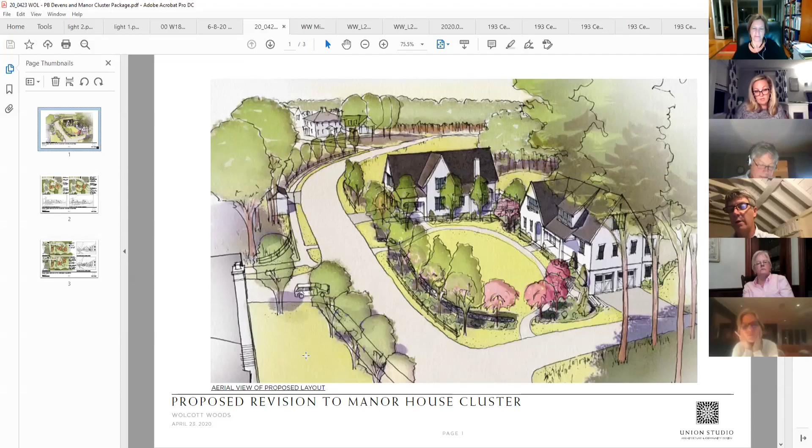And the other building will be an at-grade entry. It just felt like this rearrangement and focusing really hard on the architecture and the intersection gave us an opportunity to improve the plan in a significant way. So that's that little change in that area.

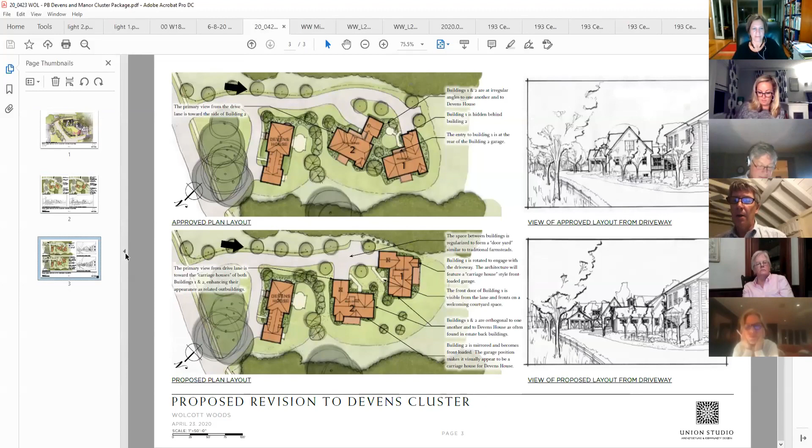If we can go to the next slide, thank you. Again, the top half of this is what was approved. Units 1 and 2 behind the Devens House, accessed via a common driveway. As you look down that common driveway, you saw sort of the end elevation of Unit 2, which isn't horrible.

But looking at it in a slightly different way, the team came up with a twisting and turning of the two buildings. This took Unit 2 somewhat out of visual play, more so than the first time, and allowed the focus on the architectural element of the carriage, like garage element of those two units.

It also improved the front yard. You can see in the upper drawing this pinched area behind unit 2's garage, and then the front entry of Unit 1, while in some respects is quite private, it's looking at the back end of Unit 2.

By twisting and reconfiguring them, we create what has been called a little door yard in between the two units, where the walkways and a sense of place let you interact with your neighbor as you come and go and say hi, how you doing, how are things going, in a much more social and collaborative way.

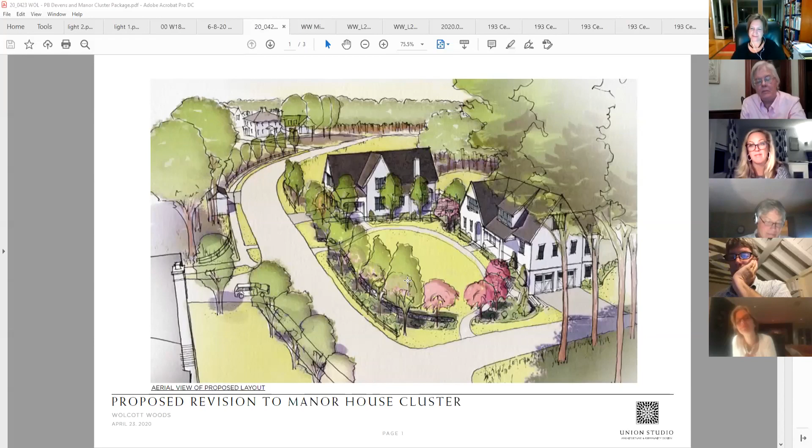Kathleen? I wanted to third that. I love it, as a person who lives in a neighborhood facing a little tiny park like this, I can't tell you how many people are in that park every day. So I like to see this amenity added, I think it's a great idea. And I like the twist on the other two to create some sort of better facing design. So thank you very much for the changes.

Denny? I agree. So what is that for? Just a quick question. I think they are improvements all the way around, they all make a lot of sense to me. Would the square footage of the units change? No. We have a maximum, Denny, and we're not looking for more square footage. If anything, we're probably ratcheting it down a little bit, but it will not. Wonderful.

Well, thank you. It will comport with, we're trying to do sort of micro design as opposed to macro design. When we go through a site plan approval process, we're trying to really micro design each little neighborhood as we start placing the units in it. And you'll see Peter and I come back again. We're taking a good hard look at the Wolcott cluster as we speak, and just making sure we do the best we can and integrate.

We put a lot of effort in the first time, but I think as we go through this and really focus the microscope down into each little cluster, we see opportunities and learnings that we think, frankly, I've said this a couple of times, this is one of the best, nicest, most important pieces of ground that I've worked on in 35 years in the business, and it really requires extraordinary care at every step of the way, and that's we're trying to walk the walk in that respect.

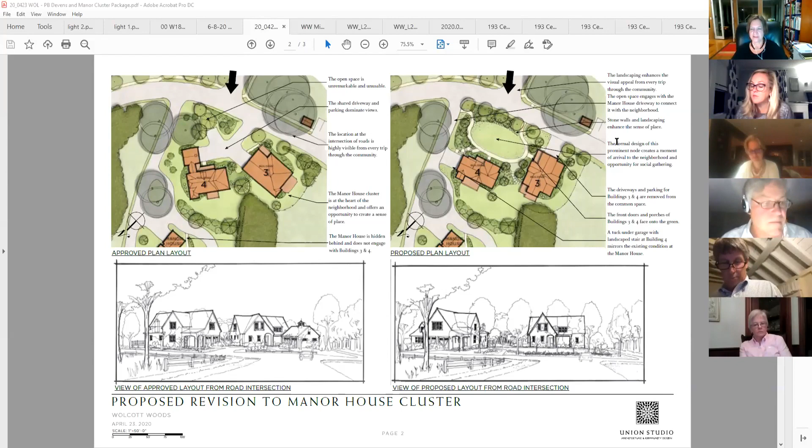Thank you, Jack, and thanks for your patience tonight waiting to get to this on our agenda. Thanks for your consideration and all the hard work. I would echo what Ned said about Bill. As many of you know, I spend two to three nights a week in front of planning boards in different towns, and Bill has run a good planning shop. He's responsive, he's tough when it's appropriate, he's fair when it's appropriate. I think the town was served well by his tenure, and I believe the town will miss his professionalism going forward. It was nice working with you, Bill. Thanks, Jack.

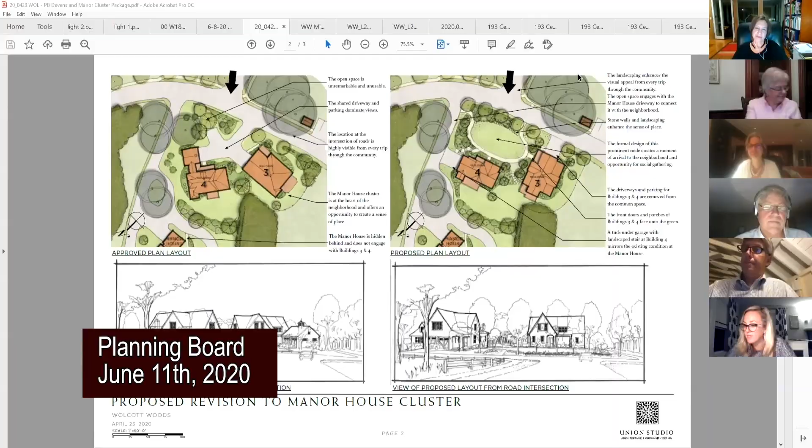Okay, I'm going to stop this share. All right, next on our agenda under old business, the Pulte Homes affordable housing units discussion, next steps and timelines. I'm going to ask Bill to give us an overview and Kathleen to chime in when he's done.

I just had Mark up there and he just hung up. Oh, there he is, I'm here Bill. There he is, all right, he turned his video on. Okay, and I'm going to unmute. No, and Julie's there too. I've been here for three hours. It's been a meeting, you all have done a very nice job. I see Julie just popped in the last five or ten minutes, so I missed the memo. This is my second three-hour meeting this week. I had to sit in another town and listen to a lot of discussion about putting restaurant tables on the sidewalk while I was waiting for one small thing. Julie has herself muted, so I can't unmute her. All right, Julie, you'll have to unmute yourself when you're ready.

All right, Pulte is at house number 10 for certificate of occupancy. They expect to get number 11 the first week in July. When they get number 11, that would be the 50% that is in the special permit. The special permit does allow for changes to be done by the planning board.